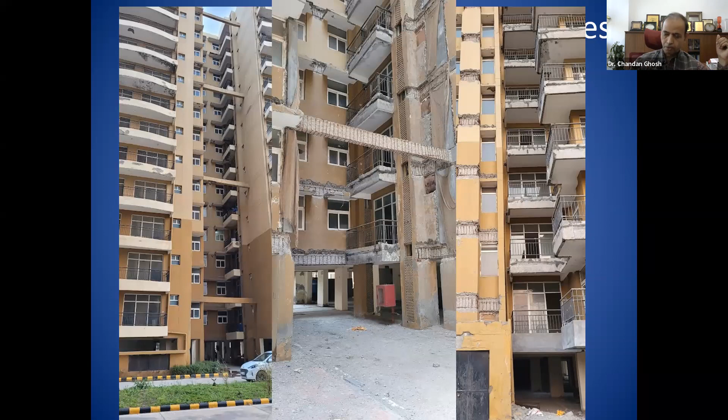Here is another scenario. You see it was completely taken off, peeled off in the same building complex, and is to be replastered, but with no addition of reinforcement. So generally, if only microconcrete is being added, we do not say that it is retrofitting in our parlance—rather it is repairing or replastering with a better concrete or whatever material that may not face similar difficulty.

But when we go for checking buildings, especially mapping and health checking, there are various stages. This kind of photograph was published in 1988 by a FEMA publication, showing how to do rapid visual screening before taking up these things.

So I will show some facets of screening or testing, taking samples from this building which we visited just recently, and see what kind of sampling is being done based on which such decisions are taken. We have to check what the standards are for taking samples from an existing live building before taking up such decisions.

Of course, day after tomorrow it will be discussed in more detail. This is just a close view of those buildings and their repairing work, which has been going on for more than a year now. The context I would like to flag over here is...

Soft measures for built-up facilities to avoid large-scale damage, which I'll show a few photographs of quickly—some soft measures, not in terms of retrofitting as we understand it as civil engineers in this industry.

And then the role of forensics in damage evaluation—we'll see what kind of damage evaluation we do, and the interpretation of the report for taking a decision professionally. Then how the American Society of Civil Engineers, a professional body known to all of us, makes an infrastructure report card every 3 to 4 years, and how government takes action based on such a professional report submitted by an organization very well known to us.

Post-earthquake event information and inspection—what are those things? I'll show a few of them.

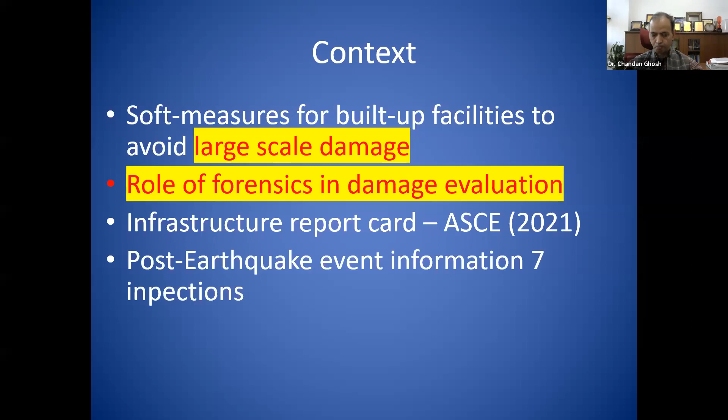And checking the performance of buildings—what kind of large-scale simulation and physical tests on a 6-story, 8-story building, which of course we do not have the facility to conduct for a large-scale building. We generally don't do them; rather we test 1-story or 2-story buildings, but our buildings are 10-story, 20-story on stilts. So what kind of large-scale simulation and physical tests of 6-story, 7-story, even 8-story buildings are being done to check performance? Unfortunately we do not have such facility, but shared experience, information and reports available are enough to take guidance from—those reports, publications and videos, which I'll show a few of.

Now, in order to take this forward, health checkup for this - this is in East Delhi, near Akshardham temples, and this is NH24 going from Delhi side to this side. If we say we have a host of experts and agencies for health mapping, and a host of organizations dealing with retrofitting - I think taking any building in such a highly valued area, and you see the spaces from Google Earth, it's rather a health checkup for this kind of issue I'm talking about.

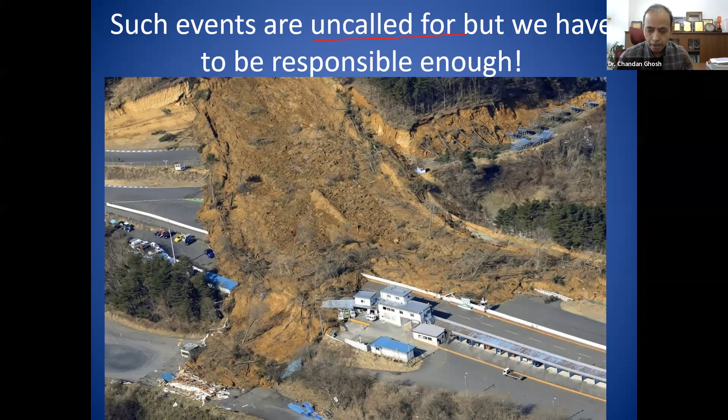Whereas earthquakes happen, or such storage facilities are there - it's not simply the earthquake, nothing has happened. There are many cascading effects that happen, which we are familiar with. In our country, we haven't experienced such events the way Japan, Mexico, or California have experienced - the cascading effects of earthquakes.

Of course, we are familiar with the tsunami in 2004. So earthquake caused so many things - primarily landslides, dam failure, or building collapse, and then fire, explosion, or anything may be a cascading effect there.

So our building code, or any code rather, it's not possible to address such cascading effects on our facilities in this manner. That is why whenever any facility - whether it's a bridge, a culvert, a building, or a water tank - whatever we are making, we need to consider this.

That is why the National Building Code has taken all these things into account in the 2016 version - what are the cascading effects, how parking facilities have to be made, and in case of earthquake or flood, what are the secondary, tertiary things that are going to happen. So I'll give some of those examples.

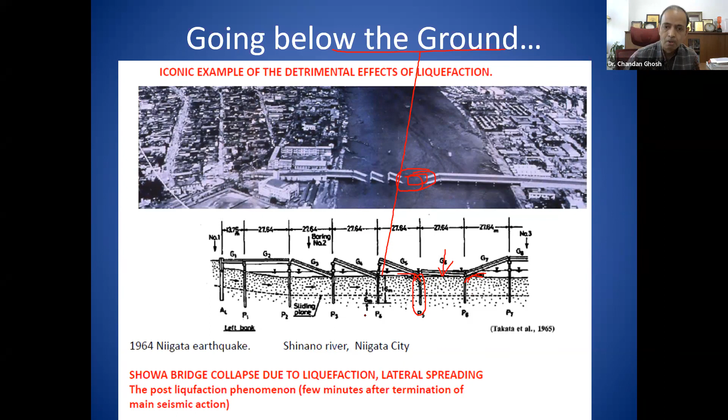And having such failures happening across the globe in earthquake-prone areas, knowing that such things are happening, how many of us as of today have taken proactive measures by creating such props, support, or dampers? I think very few have attempted or even thought of this. So we have to see more detail.

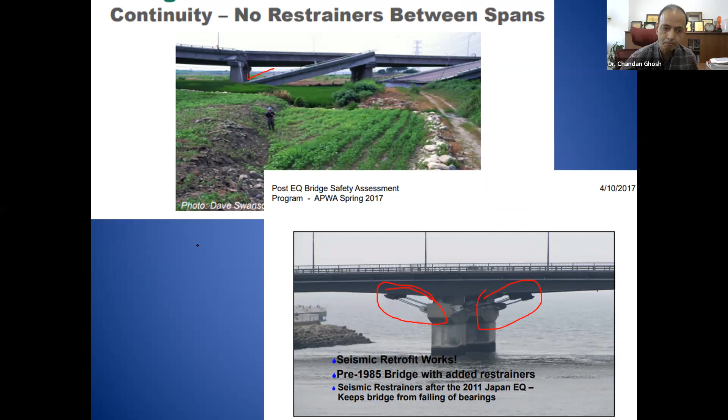Like this one: on 18 September 2011, the Sikkim-Nepal border earthquake happened. This bridge is more than 70 kilometers away, and it functioned well due to the earthquake, nothing unusual seen on it. But after 3 months, exactly 3 months after the earthquake on 18 September 2011...

This bridge was crossed by some heavy equipment required for making hydro power stations in the northern part of Sikkim. So no attention was given to the fact that due to earthquake shaking, the existing structure had experienced some kind of cracks or deterioration of its properties.

Post-earthquake investigation isn't something we do only after a failure; health mapping has to be done after an earthquake on any such structure, whether a bridge or building, to check what kind of cracks or progressive failure has occurred. Had we checked this in 2011, we didn't have any such program to check facilities that were still standing but not yet failed, resulting in collapse when this trailer carried equipment over it, creating such a mess.

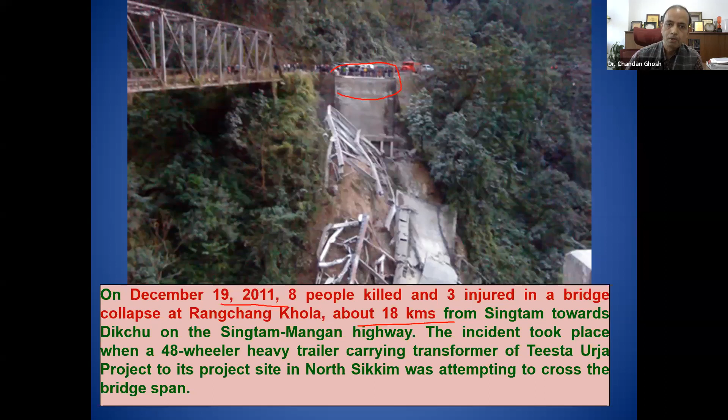It is not only about health structure, but at the same time, we have not yet progressed enough to stop a train or to stop a nuclear facility due to earthquake or any such natural event.

Like in this case, a Shinkansen or bullet train was stopped on 23rd October 2004 by an automatic brake applied within 5 to 7 seconds after the earthquake occurred, almost 16-17 years before, the mid-Niigata earthquake. So auto brake was applied on this system, on this train, to save it.

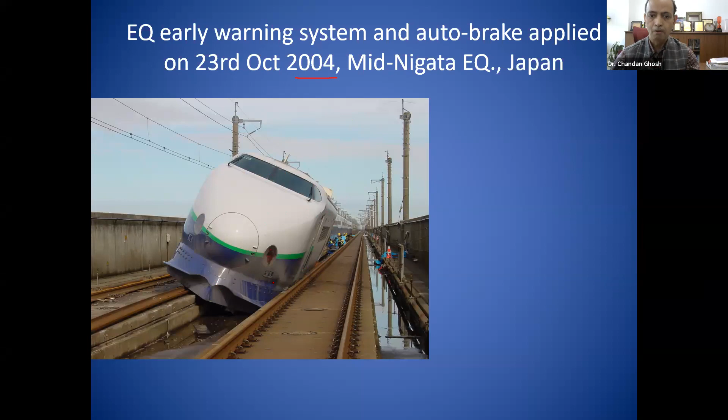It derailed, but it did not kill anyone. So in that case, what background system do we have to put in place?

It is still lying in the dark box that our scientists, earthquake specialists, seismologists, technologists, civil engineers, all together, are still looking at the science aspect of predicting more, or rather putting a system in place to catch the earthquake young, or to catch it within a few minutes.

Rather, within a few minutes it has gone 400 kilometers. Generally, an earthquake of magnitude 7 and above has a devastating area theoretically limited to about 300 kilometers. But the Mexico earthquake of 1985, or the Sikkim or Bhuj earthquakes, took a different perspective on this ideal assumption of 200 to 300 kilometers of devastating area. So what kind of system needs to be in place? We have not yet explored this.

Now, not about earthquakes, but by making flood walls we can save many such facilities in our country, like increasing the navigable capacity of the river, stream or canal, putting such soft measures quickly, using sandbags, though these are all polymer material, filling up with sand quickly to increase the capacity so that such facilities are saved.

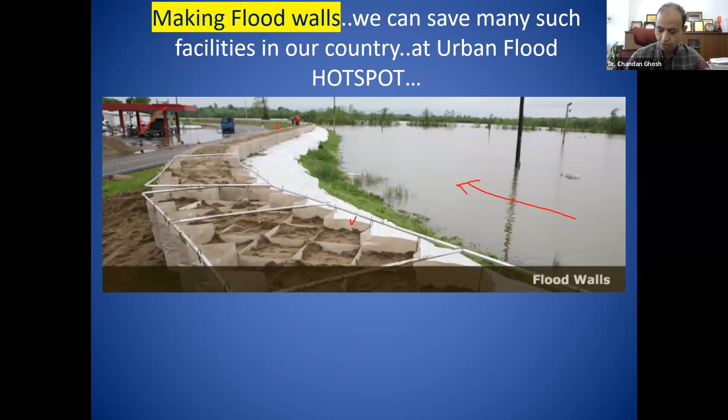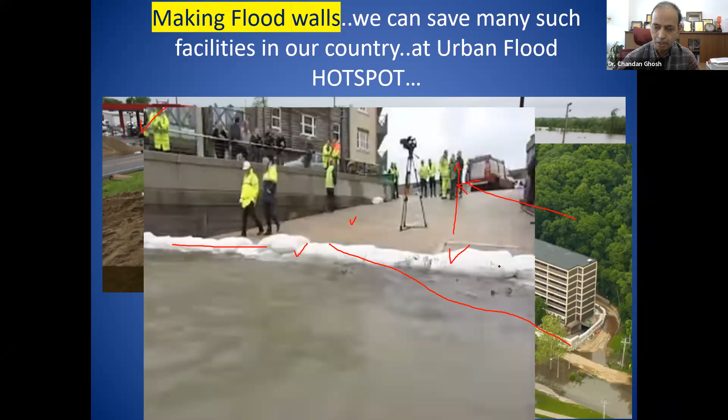This also comes under seismic, or rather health mapping of built-up facilities. Health mapping should also include maintaining the functionality of an 8-story building, hospital building, or essential building, by simply making some effort in the retaining wall to stop water entering, or even stopping water on the road using polythene or polymeric materials evolved from the petroleum industry, quickly placing them to stop water going further, or even stopping water from entering our compound.

Most multi-story buildings have even 2 or 3 tiers underground. We do not have any arrangement in our multi-story buildings which are soft. Not only that, soft story buildings exist, which are dangerous. I'll show a video on that experiment that has been done.

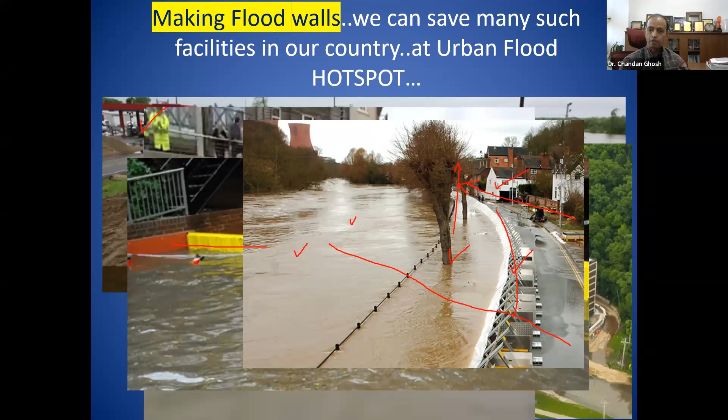Such measures, if included into our health mapping of facilities, will probably serve a lot of positivity into the community, professionally and through community involvement, or even by making such structures quickly. If we make it, we can save these facilities. Though in this series we are looking into earthquake related things, there are many such soft measures that help us check damages to our facilities.

Now coming to the second part, mapping: the American Civil Engineer report card, in 2021 overall gave a C- grade. We understand C- grade like in a class where a student is given C-, out of 10 that's maybe 6 or 6.5. So that is the overall grading they gave to their infrastructure.

This report came out in 2021, available freely, and the federal infrastructure bill passed in November. The bill addresses 16 of the 17 categories outlined in ASCE's 2021 infrastructure report card, and addresses more than 40 of the solutions laid out in the ASCE's report.

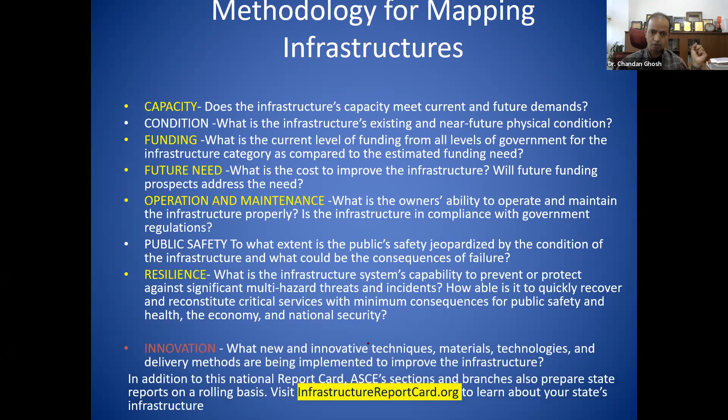And what the report says is that it has discussed all these things about the capacity, condition, funding, and $1.2 trillion has been given now in November 2021 for the next 5 years in all the states. And so operation and maintenance, how it is in the report, the ASCE report has mentioned all these things, how it is to be done, and resilience, and then innovations and everything it has given. So otherwise, the report also contains such kind of things.

By 2039, America's overdue infrastructure bill will be coming to $63 a week. Probably we have to look into that, how to make health mapping of our buildings, infrastructures and everything, whether it is bridges, tunnels, roads or everything. We have to look at this aspect also, how much extra bill is going to be given per capita if it is not taken in time.

So in this case, they have made about 17 categories of infrastructure. In this 17 category of infrastructure, you can see aviation, bridges, broadband, even broadband comes into there. National parks also come, drinking water and other things. We are spreading all these things in our country as of now, but we have to look at how to maintain their health and how to check their functionality while they are in use.

So these are the grades that they have given to all those 17 categories. And you see that overall grading is C-, and then aviation D+, it has gone up a little bit, bridges gone down, something like that. So these are the things that a report is available, one can see.

And as far as going to the market intelligence and other things, we are so much overpowered, or we are so much in favor of going for big data, blockchain, connectivity, IoT and all these things. So IoT is going to make many of our health mapping systems and drones and other things more rational. But of course, it requires lots of experience and knowledge base that we are having with our engineers who work in the field to verify. Otherwise, simply going by this kind of data and other things is not going to help.

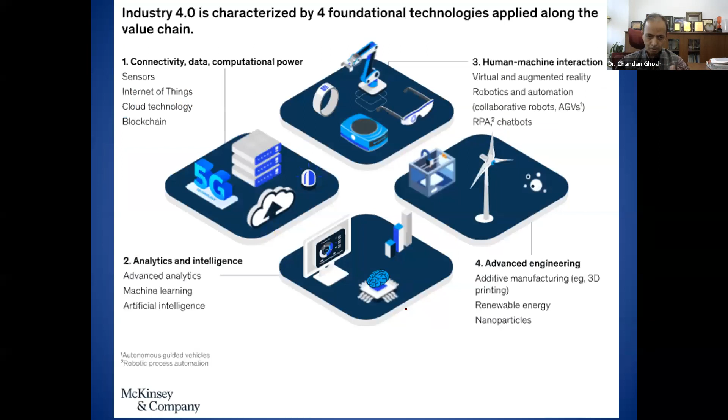So before building breakdown or anything, which is our main purpose, we can have an association of such kind of smart sensors and other things, so that we get certain kind of information daily, and even live simulation can be made. So anyway, some of these things have come up in our country as well, where panic buttons and other things are being used, or even in Chennai also it is there.

So which are now taking up the market. So I would like to say that health mapping with our own experience that we are having so far, it can be augmented by using many of these facilities and putting them and testifying their association into our investigation during construction, even post-construction or post-damage construction also. Like we expect something like this.

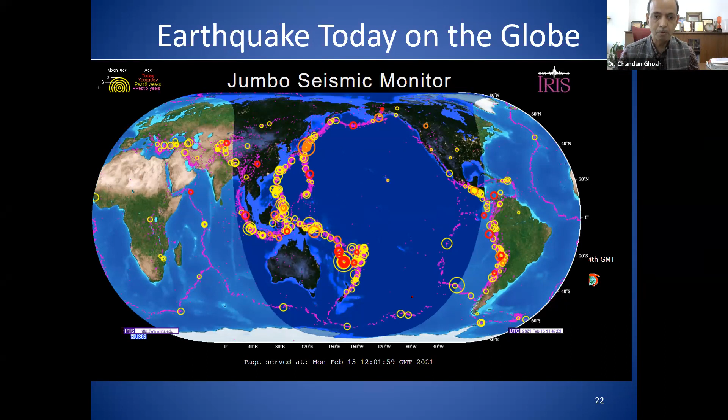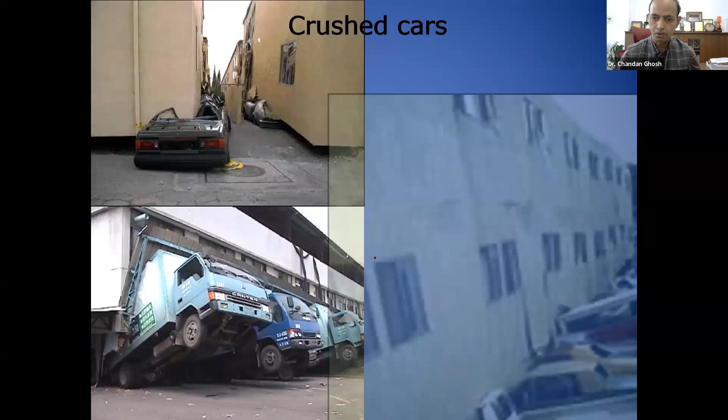But as far as retrofitting measures and other things, such kind of cross bracing is elegant enough. And otherwise, making on the building at least a wall or boundary wall like this can give some kind of surety about the seismic safety of such kind of multi-story building lying on stilt.

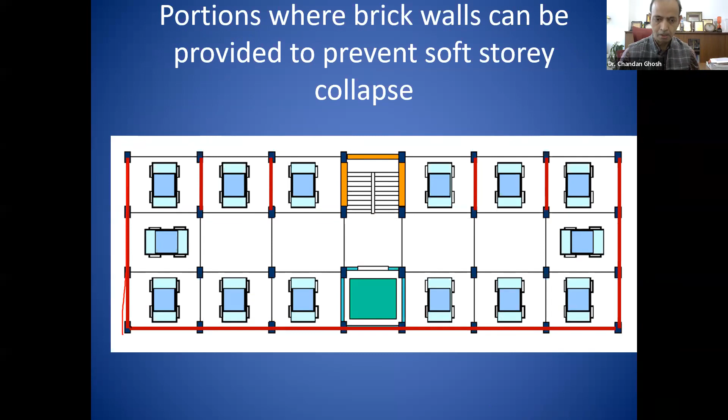So thank you. I would like to say that the quality of taking sample from the building site, which I have shown in the beginning, see whether they have been able to take the core or not, whether they have been able to justify taking some kind of sample and peeling off so much area, and what kind of tests and evaluations are going to be done in the laboratory. I think cutting and leaving this kind of scar onto the bottommost column is not the technical or scientific way of justifying our profession in assessing health of the building. Thank you very much.

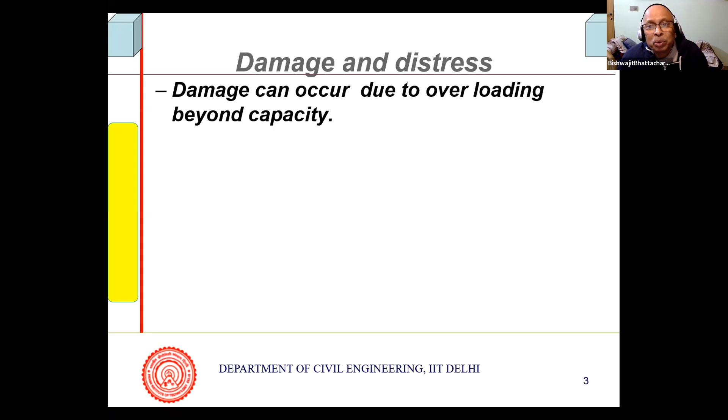Now, damage is due to overloading. And damage or distress can occur due to deterioration also. Deterioration is essentially due to degradation of material, leading to serviceability limit failure. Damages can lead to collapse as well. But most often deterioration do not lead to collapse, although the damage overloading may lead to collapse.

Several of the pictures shown by Dr. Ghosh earlier, some of them are failure. And life, I'll define them slightly more here. I'll go to one of those slides.

Repair relates to restoring the functional performance to an acceptable level - patch repair, quite often. Rehabilitation is related to complete structure, and retrofit may be to a currently acceptable standard, even though it is functionally performing.

So earthquake retrofit, it's fine, it's working, no problem, but your risk perception has changed, the code has changed. So you retrofit it to the current requirement - energy retrofit, and there are several other retrofit tools. They are not the same as possibly rehabilitation, which is essentially related to some distress.

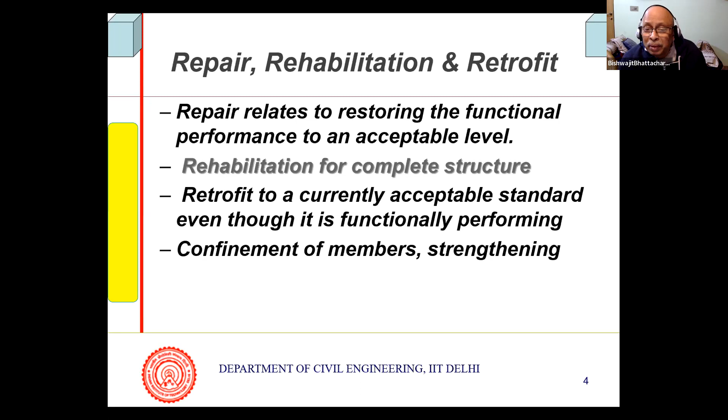Confinement of members - quite often my earthquake engineering friends, when they do repair, they will ask for the beam column junctions, confinement with fiber wraps, and then strengthening. So strengthening is jacketing and things like that.

So let me come to life a little bit more. Now, quite often, I have seen somebody asking, concrete has got 100 years of life - how can concrete have, you can define life of concrete for 100 years because it's an inanimate object and doesn't have a defined sharp boundary between life and death.

So what we talk generally of is intended design life, like a monument might have an intended design life for 1,000 years. Intended design life.

Physical life can be very, very long. Many of those Roman structures, the Dhamek Stupa in Sarnath, they are there prior to BC, before Christ, and they're still there. Economic life is after which you think maintenance is too costly and therefore you will not continue with that life. Functional, like cinema halls turning into shopping malls - the load would have also changed. Some of the bridges, functional aspect might change.

And service life is related to serviceability limit. I'm talking of concrete structures, so therefore serviceability limit we design with limit state and therefore serviceability limit is there. Service life is related to serviceability limit, and residual life actually is expected, I would say, because you cannot really predict the residual life - you can always calculate the expected residual life. Thus it depends upon context, so this is the important aspect.

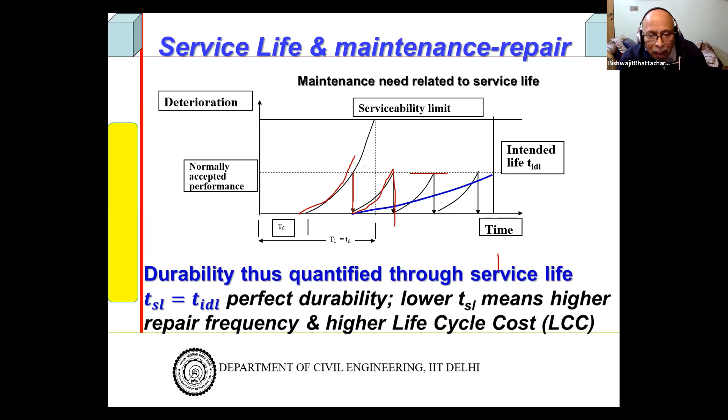So durability of structure is quantified through that. TSL, Tideal, is perfect durability, meaning service life is the same as the intended design life. So one can look into this in terms of life cycle cost.

Life cycle cost is very important because that will justify your health checkup or anything of that kind. Now, CI is a term for initial cost, and this is a term for extra quality control.

For example, Dr. Ghosh was also talking about this, and there are several cases I've come across in buildings, which Mr. Manish Bharti would also have come across, where you have rebar corrosion problems in buildings in central India, eastern India, northern India, not necessarily in the coastal area.

This is not because of anything else, because they have used land-quarried sand, unwashed, and water from the groundwater, leading to internal chloride, not ingress, internal chloride. A little bit of testing, maintaining better quality control, would have saved this.

So the life cycle cost deals with this initial cost, plus inspection cost, maintenance cost, repair cost, and the probability of failure in case there is a failure, and the cost of failure.

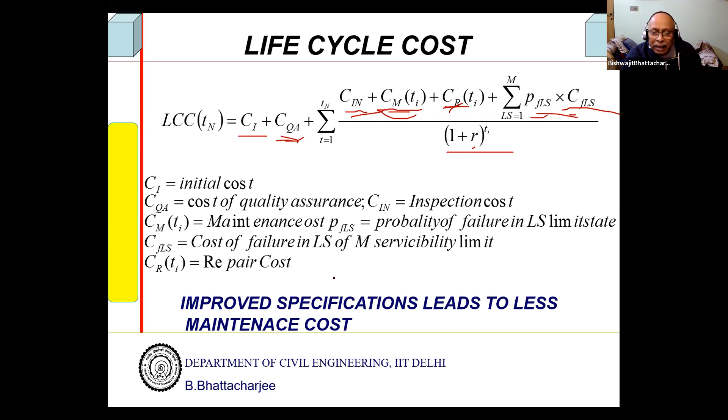Obviously, improved specifications, not only quality but specification also, lead to less maintenance cost. So health checkup is related to this.

As I said, it can be routine, or it can be post distress or damage. Routine is actually more related to health checkup. After distress also you do the health checkup, because if you have got a disease, you'll do your health checkup. But routine is the one I'm talking of.

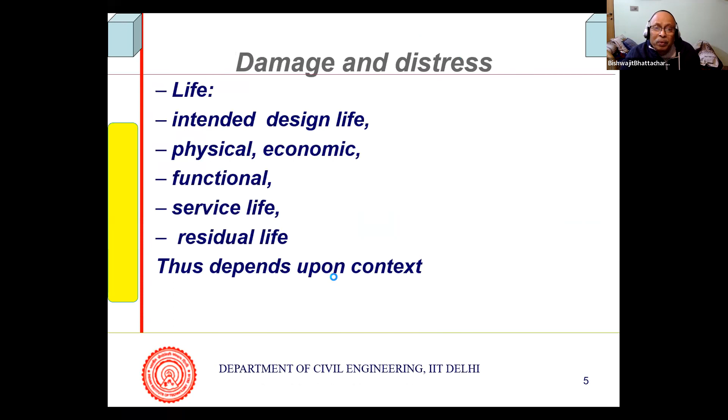More importantly, one should be doing this, and it would save a lot of cost in the long run in terms of life cycle cost. Now, major factors which affect the condition of the structure, why you need maintenance or inspection: obviously quality is important, environmental condition is important, but loading conditions also play a role.

Because fatigue loading, where you have reversal of stresses, cracks can come at much lower levels. Although reinforced concrete does not have a fixed endurance limit as we call it, it can crack at much lower level than the static monotonic load failure. So exposure environment should involve both environmental condition and loading in the context of health checkup.

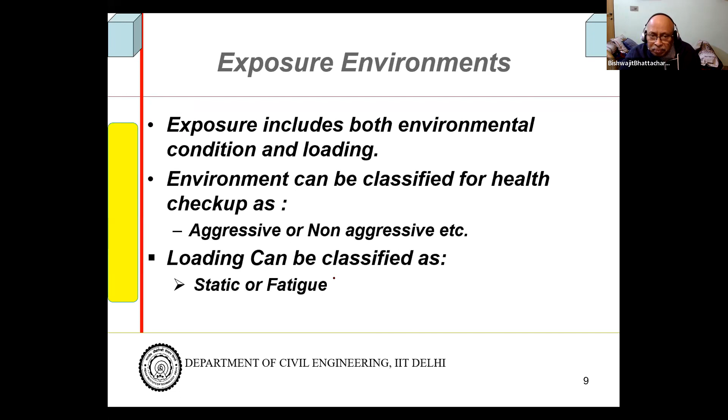Simply, you can classify health checkup as aggressive and non-aggressive, and loading can be classified as static or fatigue.

This is from CEB, a European, possibly French acronym, for the International Committee for Concrete. So what they classify is: a very severe environment will be aggressive environment with cyclic loading; severe will be aggressive environment with static loading, or non-aggressive environment with cyclic loading; and normal is non-aggressive environment with static loading.

And they provide a guideline for 3 types of structures which are important, because everywhere you are not going to do regular inspection. Class 1 is vital importance to the community, or failure can be catastrophic, like some bridges, because it can cut off supply to a particular area. Nuclear reactor structures, dams, etc. are obviously class 1 type structures.

Class 2 is considerable importance to the community, or failure may cost lives. And class 3, for example, assembly halls and things like that.

When you look at the general scenario of a structure, its resilience against sudden loads like earthquake or wind is one aspect. But for the assembly, etc., the failure can be catastrophic.

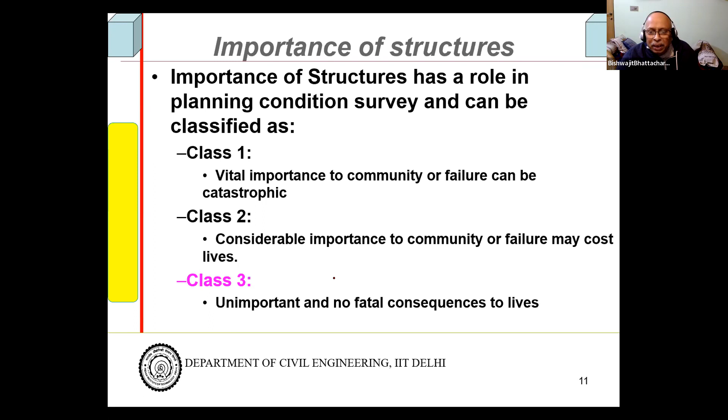Class 3 is unimportant, with no fatal consequences to lives. That's how they classify structures and give suggestions for inspection.

If your environment is very severe, that is, you have fatigue loading plus aggressive environment, then every 2 years you must do extended inspection. Extended means something more than a routine inspection. Every 2 years you should do routine too, so this year routine, next year extended, next year routine again.

For example, a thermal power plant by the Western coast, Gujarat's coast, which I saw, BHEL was supplying machines there, or maybe constructing it. That's really an aggressive environment. If the turbine foundation is not very far from the sea coast, within 5 kilometers, the aerosol can come. It's a really aggressive environment, and with repeated loading, one must check this very regularly.

If it is a class 2 structure, the inspection interval goes to 6, meaning every 3 years. For class 3, not important structures, it's 10 years, but this is all in a very severe environment. In a normal environment, for class 3 structures you may not need to do anything; for others you can follow this schedule. That is the guideline they have given, and I think this is quite fine.

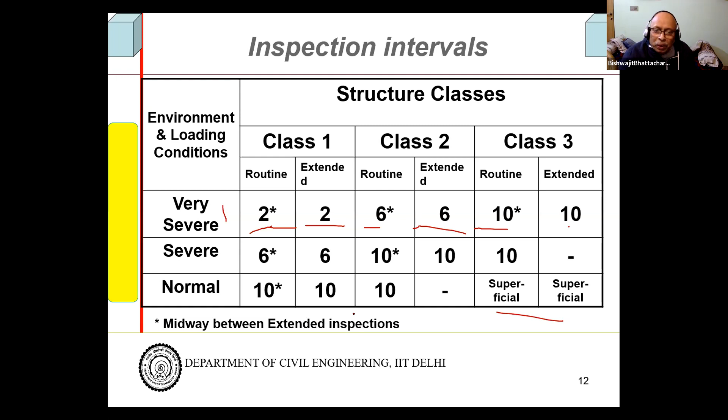Interestingly, at least one organization where I did a job for them, the Reserve Bank of India, was routinely inspecting their properties every 5 years. I did it the first time, and after that I said I didn't want to do it again because it had become repetitive for me, and I wasn't enjoying it anymore.

The best building amongst all the buildings I actually investigated at that point, somewhere in the 90s, was the one protected by Yaksha and Yakshi, the Reserve Bank main building. The construction was very good, nowhere did I find the cover less than 25 mm. It was mild steel, late 1940s and early 1950s construction. It seems interesting that the Yaksha and Yakshi in front of the building, the sculpture by Ramkinkar Baij, the famous sculptor, are protecting the building symbolically, and sure enough the building is also very well protected.

But other buildings had problems. Some they have in fact demolished.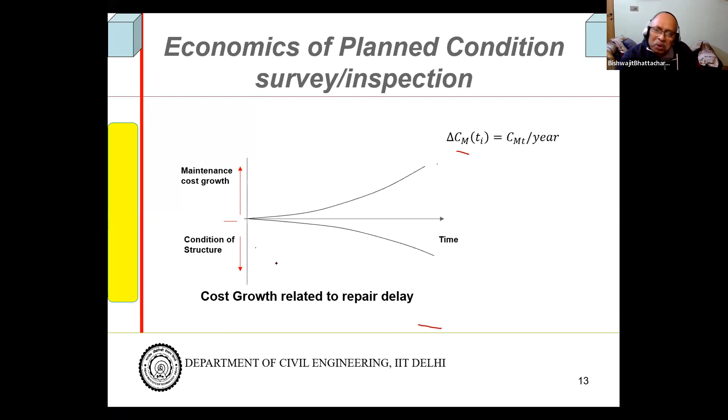Normally, if you don't do the repair in time, cost increases, and it can be parabolic, like delta CMT, the rate of change per year increase in the cost of maintenance. So if you delay repair by 2 years, first year it will be CMT, this is the point where you should have done the repair, next year it will be twice CMT, then 4 times, and so on, in a GP series. It's a parabolic curve, though it could even be exponential, so maintenance cost growth is like this.

Therefore inspection saves cost, in a nonlinear fashion it improves, and timely survey and inspection can result in saving. Suppose you do inspection on average every T years, then the average delay in repair will be T by 2, because you might inspect and repair immediately the next day, or it might have already been nearly T time since the last inspection. So the average repair delay works out to T by 2.

Total cost of survey and cost of repair one can calculate, and this can be minimized to obtain the optimal time of inspection. That was one guideline. The other is, if you have the data, you can increase your inspection frequency - inspection cost will increase, but the cost of repair will decrease.

But remember, somewhere the disruption cost is there. If you stop a bridge, it can cost a hell of a lot. For example, since I come from Northeast, earlier there was only one bridge, the Saraighat, near Guwahati. If you stopped that bridge for one day, it would cause all kinds of problems for Northeastern people - they would not have supplies.

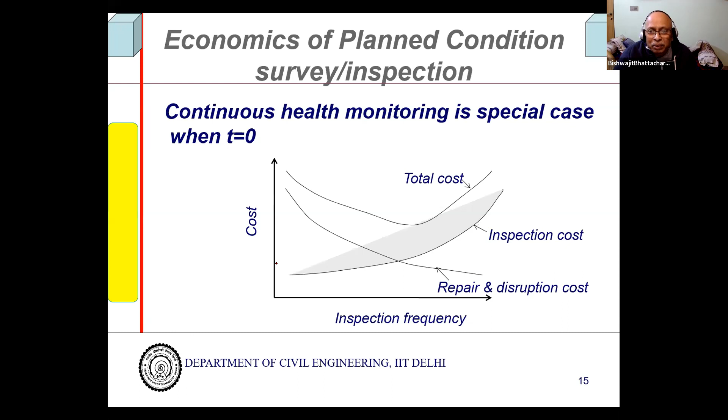So inspection or health checkup might be a good idea to save this cost. That's the model I was talking about. I did the rough calculation, rough modeling - not necessarily for you, because this is for my class students. Now, one special case is continuous health monitoring, when T equals 0.

Please tell me when I have to stop, because I do not know how much I'll be encroaching upon Mr. Manish's time. So let me know if I have to stop, then I'll go a little bit fast.

Quite often in India, condition survey is carried out on buildings, particularly after observing distress. That's not the best way to do it - it doesn't save cost. If you had monitored in time, if you had done a health checkup in time, it would have saved a lot of cost.

Health monitoring means continuous health monitoring, obviously, T equals 0. But cost has to justify this - I'll come to this. And today you have all kinds of techniques. I'll discuss some of them very quickly since it's just an introduction, and some research ideas have started coming, with sensors being embedded.

Sensors are also appearing, so I've just included them with a little bit of principles. Obviously, the major cause of deterioration in this country is rebar corrosion, but for wrong reasons - inappropriate construction practice, I'd say - because not using the right kind of material, not testing material, is a very big issue.

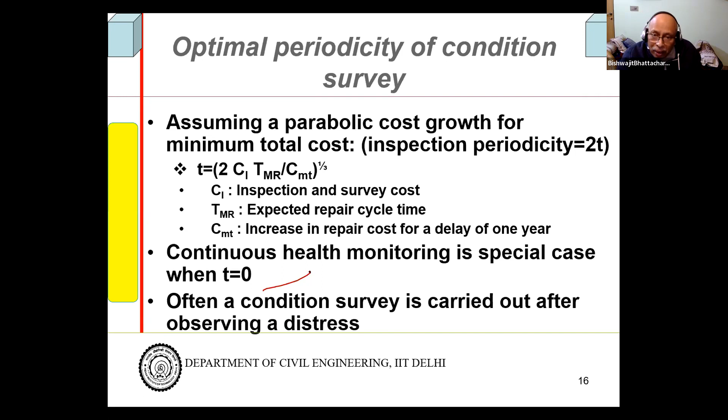Based on this, one can classify India into two kinds of zones for service life modeling, which we have been doing to calculate the service life of elements: marine zone and non-marine zone. The marine zone is about 7,000 kilometers, if I'm not wrong. So we can have submerged zone plus offshore zone. Submerged is within water, where it will be chloride ingress in saturated concrete.

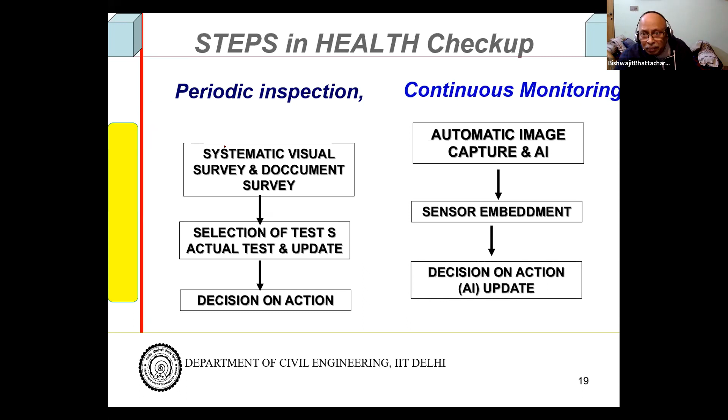Decision on action - so once you see, again artificial intelligence can come in. Drones, these are also there. I suppose one of the projects, CBRI, there are organizations like CSIR Labs with some projects with drones and things like that they've been doing.

Coming to visual survey, we did some work. One of my students is now a professor at Munjal University, Dr. Kamal Jain - his PhD project involved this.

So what we did was collect a questionnaire survey from all across the globe, from 50 people. And then we said that, okay, if this is the kind of deterioration or distress - I'm giving the example of only corrosion - for example, one example of corrosion that you have seen is rust staining has occurred.

Rust staining has occurred, and severity is minor meaning not over a very large area, only a few places. Moderate means over quite a bit, and extreme is more. Local means over a small space - minor cracks or minor rust staining, a lot of rust staining, but over a small area of the element. And global means over the whole area.

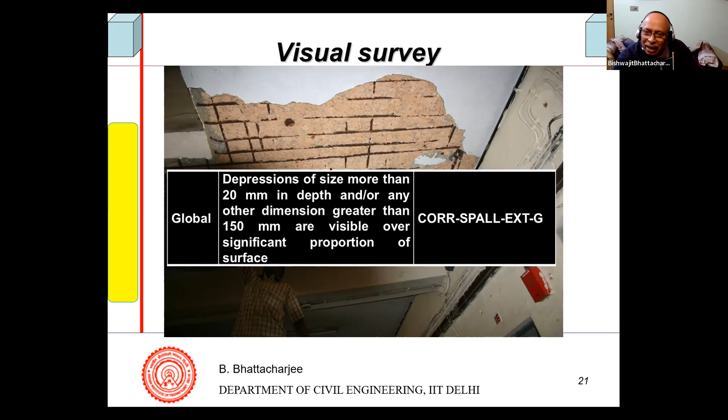It's a global code, applicable all over the place. So corrosion, spalling, extreme - this code addresses that.

This is a tool which he developed during his PhD. It's an Excel-based code. We couldn't commercialize it because we're bad salesmen. I'm not sure if Manish tried it, since Kamal worked with Manish for some time. Perhaps commercializing it would have been a good idea, but we are bad salespeople.

So this is related to the building. Now I'll talk about a few test things.

This is the half cell potential test, which people know very well. But more importantly, this can be embedded.

Another point I want to mention, although I couldn't put the slides on, is that we use this to detect chloride-induced corrosion initiation. If you can embed that effectively in the concrete and monitor it from time to time, continuous monitoring may be possible using today's networks - you can connect them and get signals over time. But it has to be moist; the concrete has to be moist. So you have to judiciously apply this embedment, and it is available.

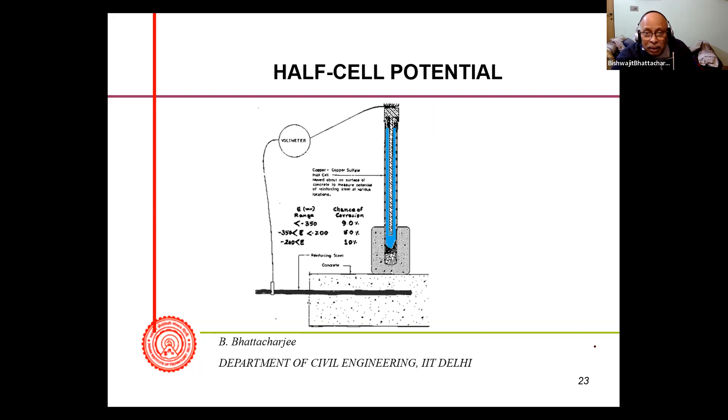This is a small case - we did a half cell potential mapping, a discrete one, in one of the balconies at IIT long back. But there are instruments which can do multiple half cell potential readings with multiple probes, giving you an idea of where the risk of corrosion is very high. So this is an external instrument, but you can embed them. That's what I mean - this is a simple one.

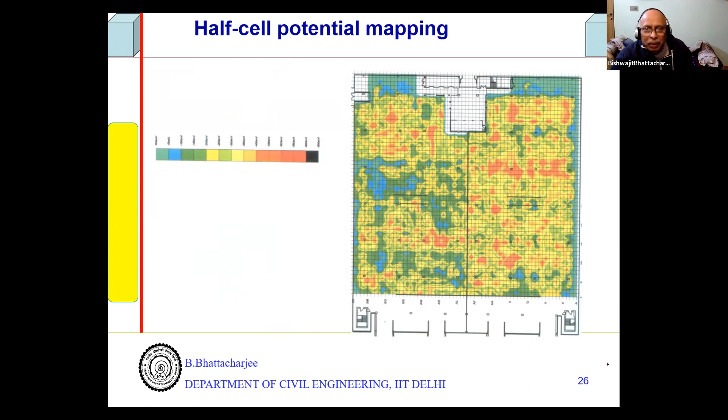Instruments are available today - impulse radar to locate rebars. This becomes very important. We do ferroscan and all that, but impulse radar gives a good indication of rebar locations. The signal has to be read though - it's not easy, one has to be an expert in interpreting these results. So this is a bar locator, and it's totally non-destructive.

It gives you much more accurate results than magnetic type instruments, which have good software but are basically based on half transformer principles.

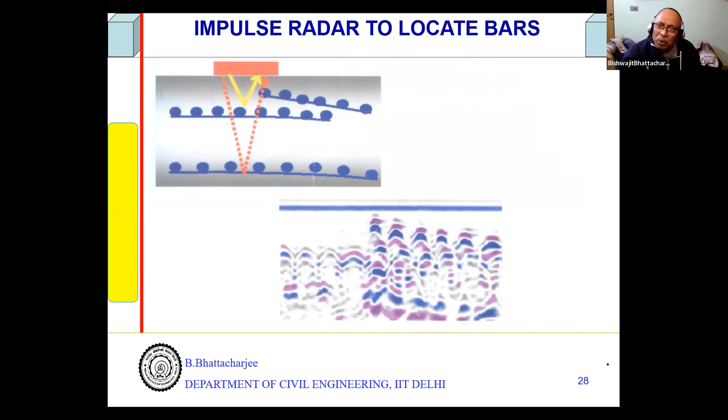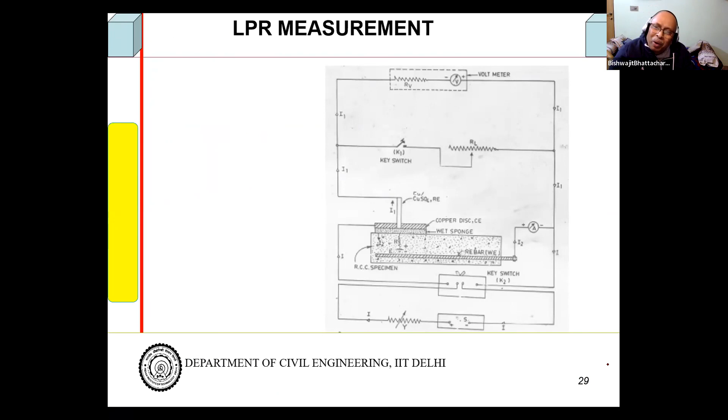I didn't cover that, but I thought this is another one I was asking for - LPR measurements. This is the schematic of LPR measurement we did in the lab long before instruments were developed, but today commercial instruments are available. I'm not talking about this one. This was also done by one of my students during his PhD in '95, Professor Shamsad Ahmad, now at King Fahd University. And a guard ring - this was not available then.

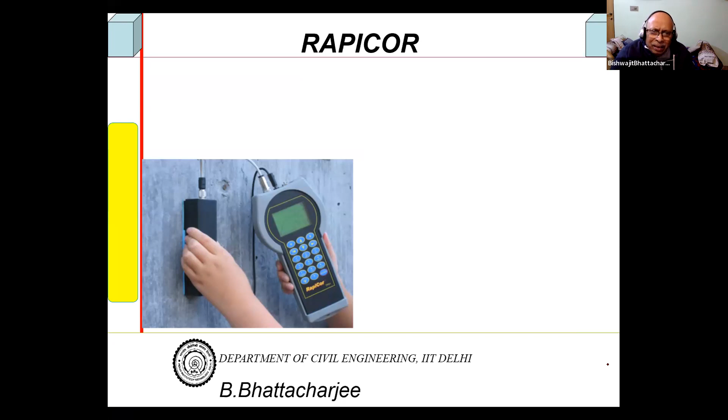Now commercial instruments are available with guard rings. For example, this is the RapiCor - you can go and measure it, right? From AEC, Eventech - Parampreet Singh sells it and does testing also. He's the one who supplied us this, and it has guarding as well, and it lets you basically find out the corrosion rate in structures non-destructively - linear polarization technique, the same technique I was mentioning.

Now these are the embedded LPR sensors. Currently these are available - what they do is put this sensor in a mortar.

You have got cathodic protection, sacrificial anode capsules today. I wanted to include this because embedded LPR sensors are possible today, though I'm not sure whether anybody in India is marketing them. In very important structures, one can put them in, particularly in splash zone areas and areas near the seashore.

Obviously, your concrete has to be free from internal chloride. One of our very recent studies showed that even near the sea coast, there is a lot of internal chloride, not really external, even 5 kilometers within, 800 meters from the seashore, because they would have used poor quality water, but I don't know what happened. You can find out by yourself.

So this is embedding it in mortar, and this system cell will be embedded in the concrete itself, and you can monitor it.

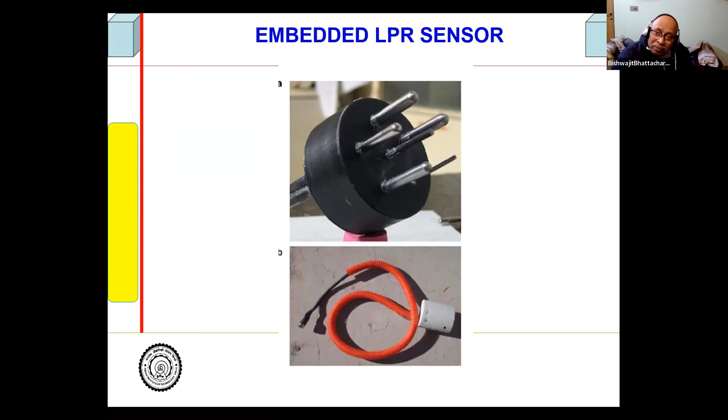Magnetic mass probe is another thing I want to talk about. This is totally non-destructive and can tell you how much quantity of rust is there. Somebody asked me before I retired, some 5-6 years back, he said somebody was selling it in India, and I asked what the cost was. He said that at that point of time, maybe 7-8 years back, it was around 35 lakhs. Anyway, I was not interested because I was not continuing for a very long time, so it should be younger friends of mine who should be buying it if they are to buy. So this can tell you how much rusting has occurred.

But these are okay, some more sensors I just want to talk about. These are also ones that one can embed: Bragg's grating fiber optic sensors. I had a chance to work with fiber optic sensing in '99 in EPFL Switzerland, but unfortunately, Bragg sensors were not there then. What we were using was Michelson's interferometry.

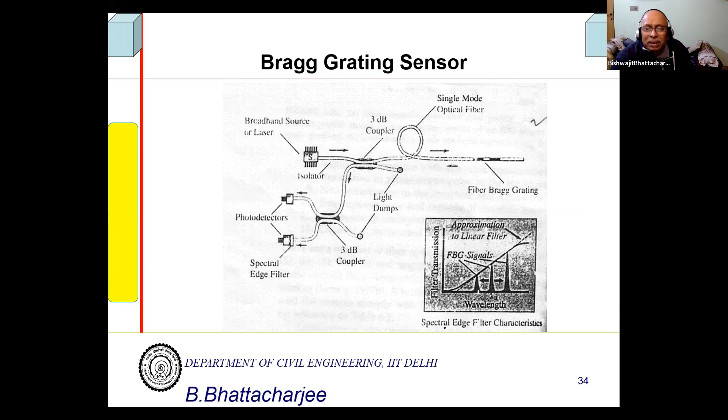One of the sensors, called Brillouin sensors, has again been attempted for use in rebar corrosion expansion. So they are basically for length change measurements, and there are commercial equipments available for this. Another area where we did work here in Delhi was with my colleague who's a master in that, Professor Suresh Bhalla, so we jointly worked on this for corrosion purposes. When it came to corrosion, he was nice enough to call me and take my expertise.

Dr. Dhawan is one of them who did his PhD as well, using some of them, and Dr. Visalakshi also used some of them. So we use this for corrosion measuring also, but they can measure damage. The piezo sensor, lead zirconate titanate, has a simple principle: if you put stress, it generates electricity, and conversely, if you apply voltage, strain can be generated. So that's basically piezoelectric sensing.

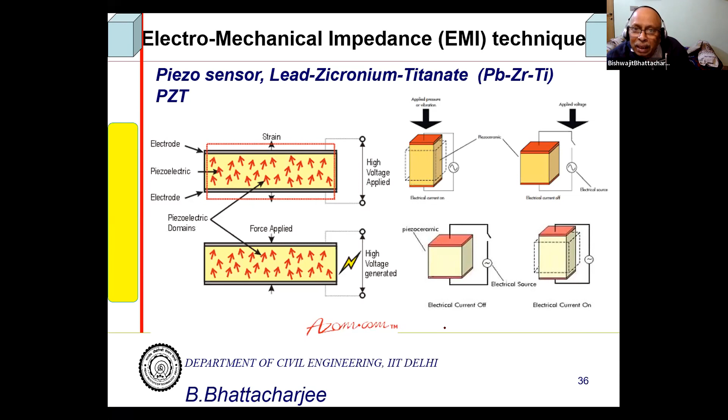So you apply stress, it generates electricity, and this can be utilized. Since it's almost 5 o'clock, I want to leave some time for Manish, so I'll have to quickly finish. We tried to use them in the laboratory for corrosion monitoring, because corrosion could cause changes in electromechanical impedance, and one can monitor that. I will not go into the theories, so these are equations, I'll just leave them out.

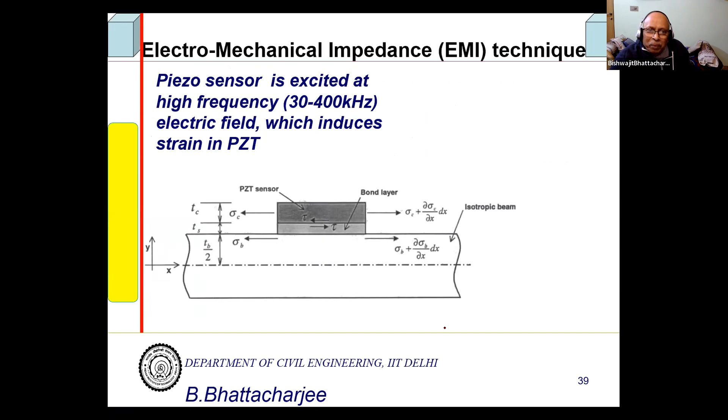But this can be used, piezoelectric patches can be used, and one can find out if there is some sort of damage. So corrosion damage also we try to find out with this. I'm not sure if commercial equipment is available for this or not, but patches are there and commercially available, pretty cheap, not very fast. It is used for several things.

So dynamic periodic electric field would induce periodic strain, etc. The back-induced periodic stress is a function of stiffness and damping properties of the substrate structure. So induced charge density, displacement, etc., we can find out from this, one can find out.

So I think this is where I'd like to end. If there is some discussion or something, I'll be very happy to discuss it. There are several other modern techniques coming based on this, and embedment is possible for deterioration-related health checkup. So continuous monitoring is possible, and there are a lot more things coming, like I said, artificial intelligence and all that. Thank you very much, thank you for hearing.

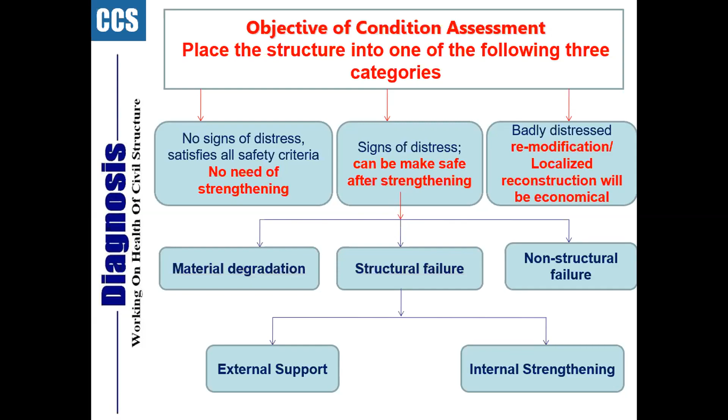So any kind of recommendation starts with diagnosis—first we have to diagnose any kind of structure, and the agenda starts with the visual condition survey. First we go to the site, collect photographs, prepare a diagnosis plan according to the demand of the pattern of distress, then conduct various tests to indicate material degradation, cause of distresses, vulnerability analysis, residual analysis, and assessment of the structure and damage classification, and providing a repair system to maintain the original strength of the structure, to provide effective retrofitting and repair methodology to restore the original strength of the structure, and a periodic maintenance system to minimize the deterioration rate of the structure.

And last, whatever we suggest to client on the basis of all the analysis, the back calculation, or the present distress level, vulnerability indices, they ask about the cost. For example, if we are going to invest 1 crore rupees to restore our structure, how long will it sustain that much load? What is the performance of the repair system, and what is the durability of your suggested repair techniques? So a lot of these questions generally come to our table.

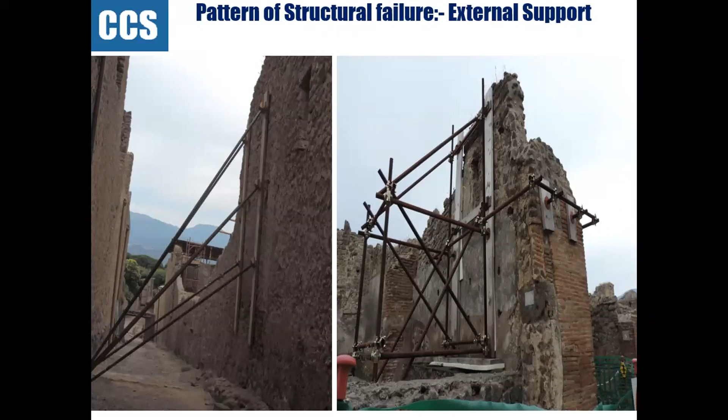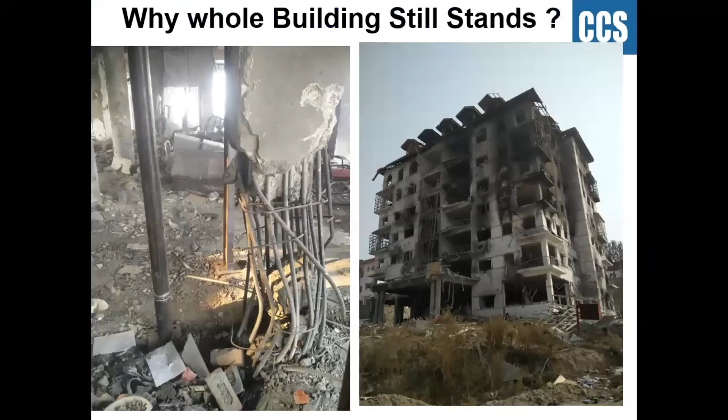So actually, this is the general typical pattern. There are a lot of distress patterns, which may be related to construction, design, material, or rate of deterioration of embedded reinforcement. All root cause analysis can be established with the help of a diagnosis system only. For that, I have prepared one flow chart on how we generally conclude the present health status of any structure.

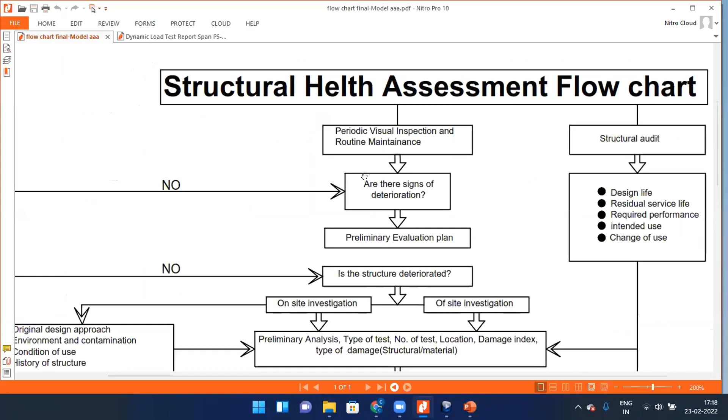First, we go for periodic visual inspection and routine maintenance. Are there signs of deterioration? If no, then it need not be repaired. Now we go for a preliminary evaluation plan if there's structural deterioration. If there is deterioration, then we go for on-site investigation and off-site investigation.

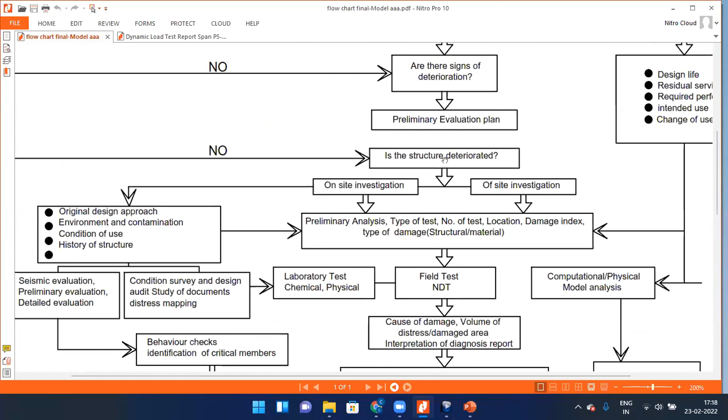In on-site investigation, we look at the original design approach, environmental condition, contamination, condition of use, history of the structure. Then we go for seismic evaluation for preliminary evaluation, that is called RVS, rapid visual screening, and detailed evaluation. Then second is the condition survey and design audit, study of documents, and distress mapping.

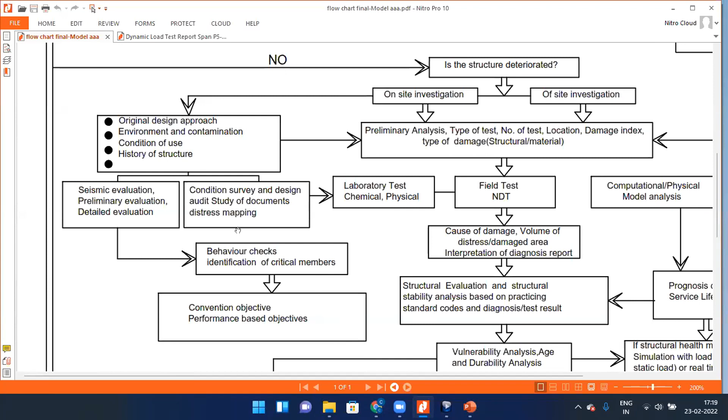Concluding all this, we check the behavior check. That means if there's some deflection in the beam, how it has deflected. If there's some crack, what is the pattern and width of the crack. If there's similar loading in the neighboring member, how both members have behaved, similarly or not. So conventional objective and performance objective we decide along with our client.

And then we go for the field test. Field test gives us one kind of very necessary tool. On that basis, we can go for cause analysis, cause of damage, volume of distress, damage area, interpretation of diagnosis report. And then we go for some computational or physical model analysis, if needed, in terms of seismic forces or wind forces, to check if it is safe for the earthquake load or not, because actually NDT gives an idea about only the material strength. It is not more related to whether it's safe for that particular load system or not.

Now, if you go for computational analysis, we take the data whatever we observe from the field. That means if presently there's a grade of concrete M20, but initially it was constructed as per design data as M30, in the computational model we'll take M20 grade of concrete only.

For example, if initially there was some certain percentage of steel provided in the beam or column, but if it has deteriorated 20%, then in the modeling we will take some correction factor, a reduction in the steel percentage provided in the existing structure. That way we can interpret the actual model in the present condition.

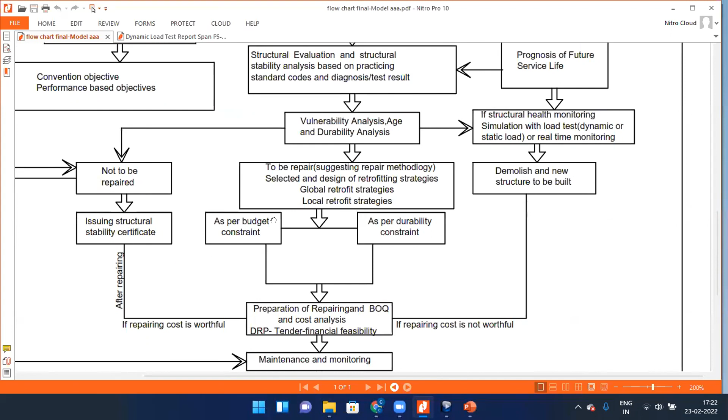The repair can be global or localized. If it's a global repair, we have to go as per budget constraint or durability constraint. Based on budget constraint, we can suggest this repair system will last only 5 or 10 years. If you go for another repair system, that will last 20 or 30 years. It totally depends on the client, how much budget they have.

On that basis, we generally prepare the repair techniques and BOQ, cost analysis, and if required, we prepare the tender and financial feasibility. If a repair cost is not worthwhile, then we recommend demolishing and building a new structure. If a repair cost is worthwhile, then after the repair we issue a structural stability certificate.

That certificate is related to performance, because we can't predict how much another earthquake load will come, how it will be maintained, or how periodically the same building will be limited for that particular load. So if we change the usage of the building, as written here, the design residual service life and design life totally depend on the intended use and change of usage.

If we change the use, even the environmental condition is not localized only to weather condition. Sometimes we change a normal building into an industrial building. For example, we were using some storage, now you are using it as caustic soda storage. So the alkalinity or chemical effects surrounding the concrete generally change, and the rate of deterioration will be totally changed.

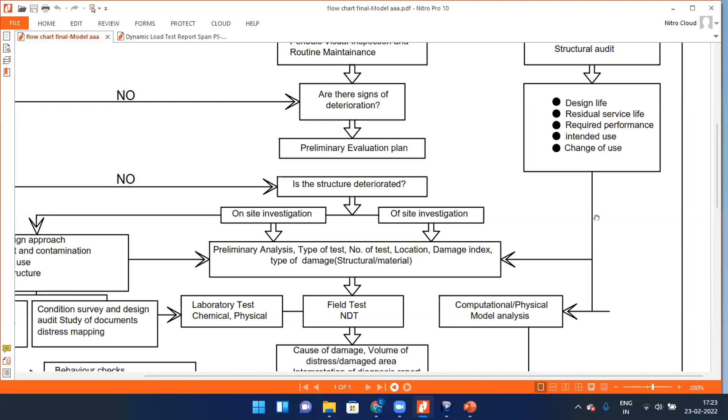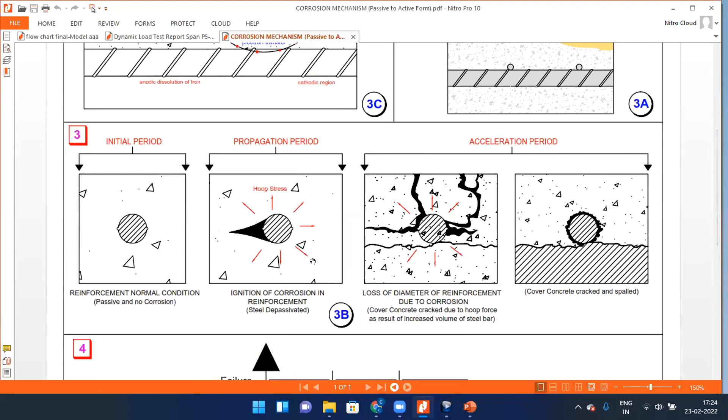So the hoop stress pushes extra force on the concrete, and after some time you can see the cover spall and the reinforcement get exposed. This is the general pattern of how corrosion starts from the passive form into the active form, starting from minor cracks along the main reinforcement and lasting up to exposure of the reinforcement.

This model is generally understood after the exposure of steel, when we get the panic. Then we start to investigate in terms of chloride content or half-cell potential to determine what is the reason behind such kind of distress - whether it's chloride, permeable concrete, or moisture ingress surrounding that area.

So that is one kind of criteria, generally called investigation after the distress has already been observed at the site - this is called post-disaster or post-distress investigation. But in terms of sensors or other mathematical tools, there are now a lot of these in the market.

Just sharing one report. This is one bridge, a flyover in Khidirpur in Kolkata. We are doing here the dynamic analysis for the RITES and HRBC.

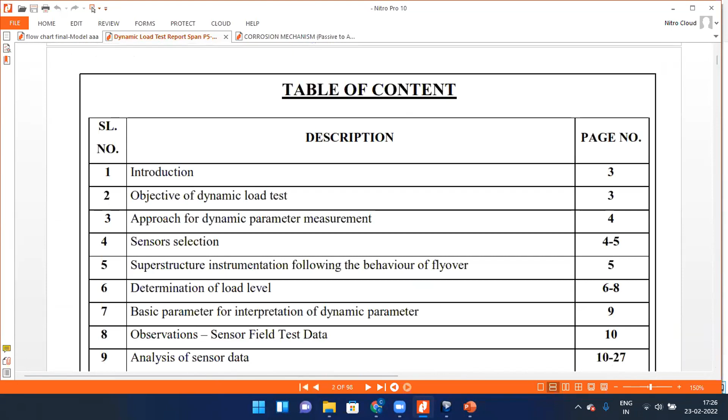For that, we defined the model in Midas. We prepared one model analysis, and then you can see here - case 1, case 2, and case 4, up to 4 cases we prepared. We generally ran a truck at different speeds, 10 kilometers per hour or 20 kilometers per hour.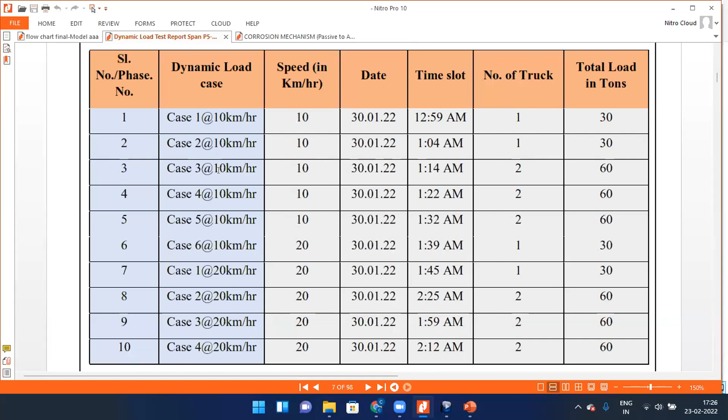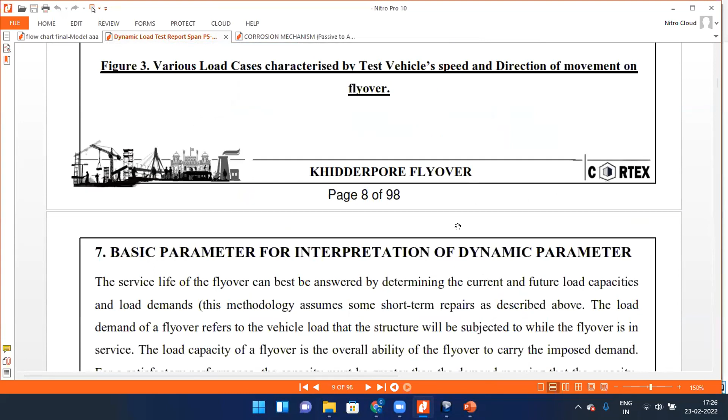In case 1, you can see one truck in a single lane, and another truck in a different lane, then 2 trucks at 10 kilometer speed, and in parallel 2 trucks at 20 kilometer speed. So to generate different mode shapes in the structure, we ran trucks with different speed and different load.

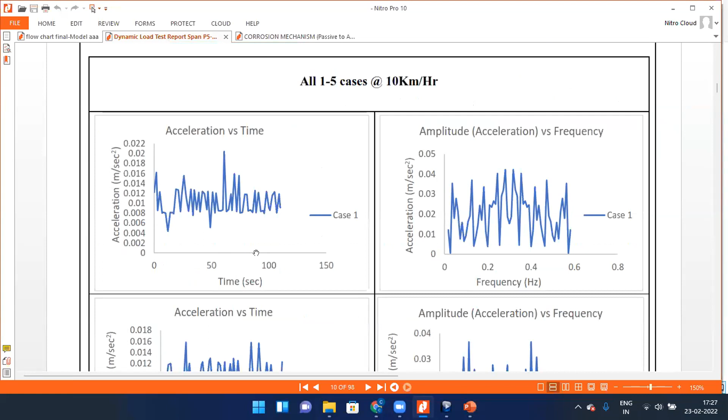That way we generated the acceleration over the superstructure to see the behavior under dynamic loading. This dynamic loading was compared with the modal analysis. In the model, you can see here, the model gives the mode shape and natural frequency, which was compared with the forced frequency observed during testing. So that way we concluded, this is our conclusion sheet here.

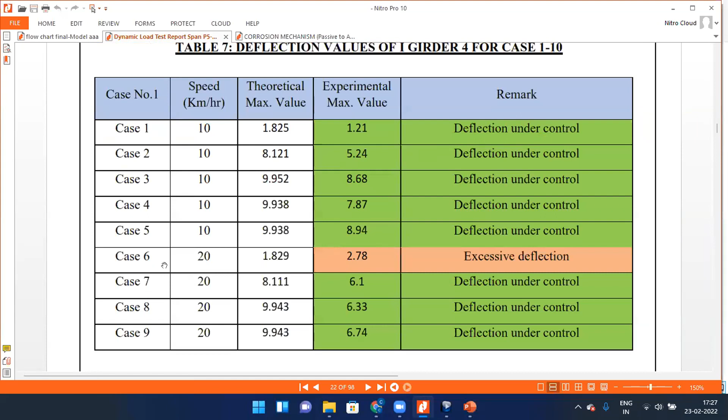If we ran case 1 at 10 kilometer speed, deflection was under control. But in case 6, up to 20 kilometer speed, there is excessive deflection. If we go for vibration, it was interpreted in a different way. Girder 1 shows excessive vibration, girder 1 and 3 show excessive vibration, while others are under control.

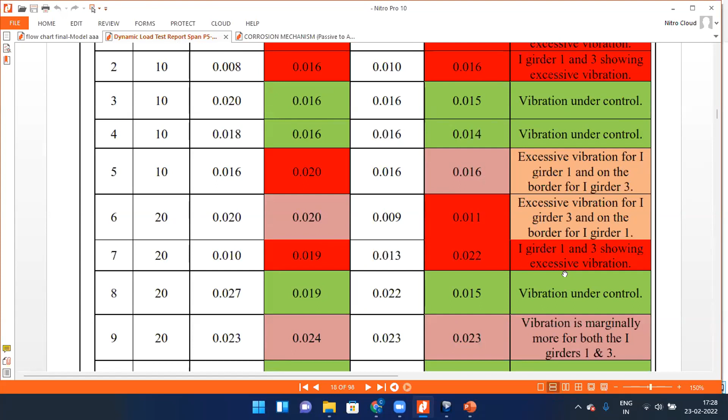This way we interpreted the different girder system and overall superstructure, deck slab and pier structure. We observed the vibration of different structures by generating external forced vibration over the superstructure. After simulation with design analysis as well as control vibration, because that time the bridge was stopped and we ran only our vehicle in a controlled, defined way, matching how we prepared the modal analysis in our Midas software.

But right now, the traffic pattern is different from the controlled traffic. So for that, we have installed our sensor at the site. You can see it is in running condition right now, already installed in Khidderpore. This recording is from February 23rd.

Right now you can see the vibration coming online on our cloud software, and this software is observing vibration in 3 axes. The y-axis is vertical down, you can see the x-axis, which has a different pattern, and now this is the z-axis. So the accelerometer is a 3-axis accelerometer.

We can easily see the behavior of our existing structure under running traffic load. It has horizontal movement, vertical down movement, and shear plane movement. So if any distress comes, we can observe the behavior with real-time data, meaning real-time loading. We can also put some limit value, and if vibration crosses that limit value, we'll get an alarm.

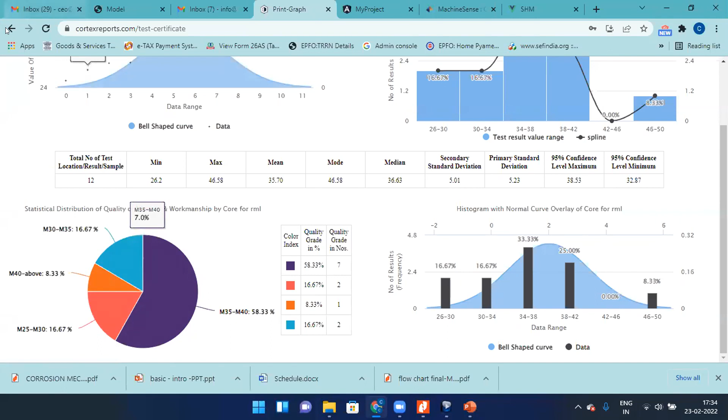If you do it this way, then we can have more information. For example, I'm putting here a bar chart. If you go for the comparative analysis, for example here, level 1, core 1 - this one, M20, is before grouting.

Core 1 after grouting, for example M30. Now coming to core 2, before grouting, 40.

Now if you go for the comparative analysis, you can see here this comparison - how the data has generally changed. If you go for the minimum, for example, minimum grade of concrete should be M15, maximum should be M40, average should be at least M20 after the repair or grouting.

The graph name is sample condition, the y-axis is MPa or something, y-axis name is grade, and we verify before grouting and after grouting.

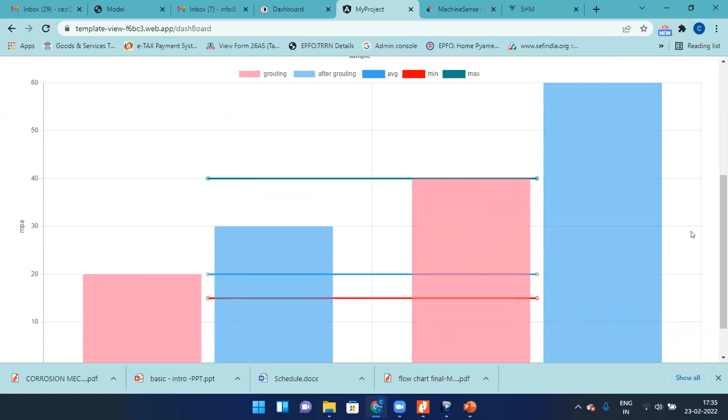So you can see here how our statistical analysis shows how much of the sample is lying above average, below average, below the threshold value, and above our maximum expected design value after the grout.

This way we can interpret the data more accurately. We can even control our repair system, monitor the execution quality job at the site, and then come up with guidelines.

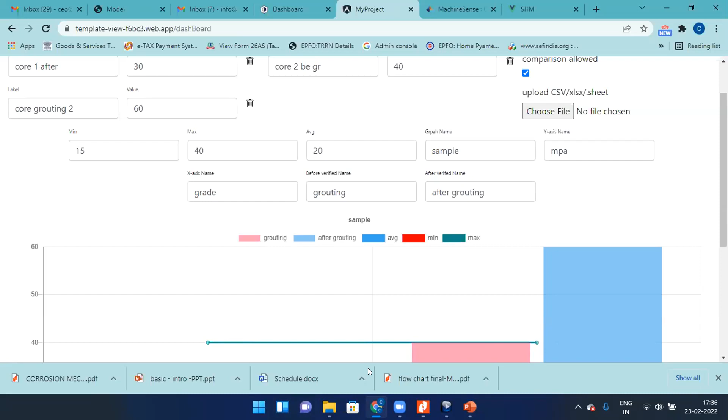Guidelines should always change along with the type of machine or equipment coming in the market, or the sensor type and accuracy, and whoever is using the same kind of technique in the field - all should be simulated together. Only then can we give perfect consultancy and conclude the present health condition of the existing structure accurately. So this is my whole theory.

Hello. Okay, so sir, this is my final presentation.

Actually, for that I have developed an app, so any person can go to the site and, by using the Android app, collect information from different sites. That information becomes part of our cloud system in real time, and the interpretation happens in real time too. Any expert in his office can easily see how the data is being collected, and whether that data can be used in the interpretation or not. This way we can minimize the error in our consultancy.